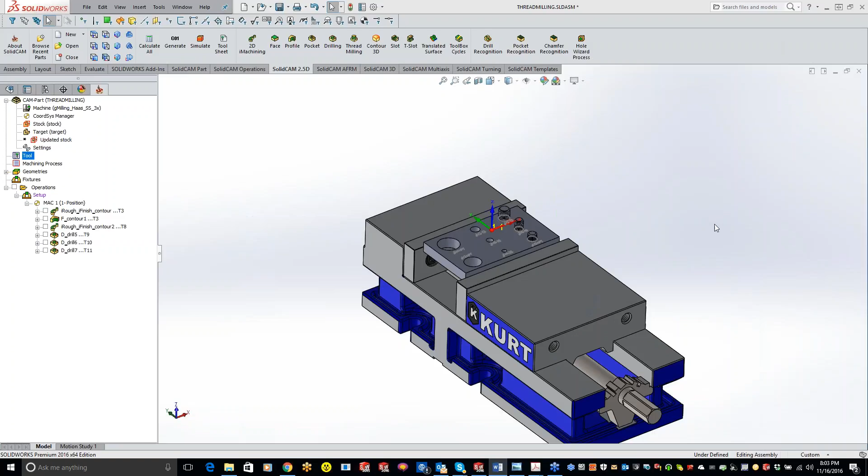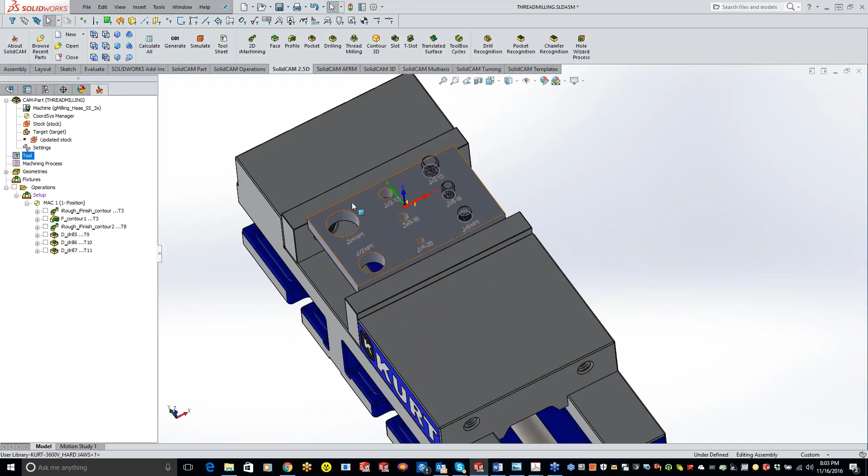All right, let's get rocking with our part. I came up with a part that has a pipe tap with through holes, some standard taps, a pipe tap with a boss, and some standard taps with a boss also. I went through and rough cut everything to size, so the holes are already drilled for you guys - you don't have to waste time watching me drill holes and machine those pockets. If you do have questions along the way, let us know.

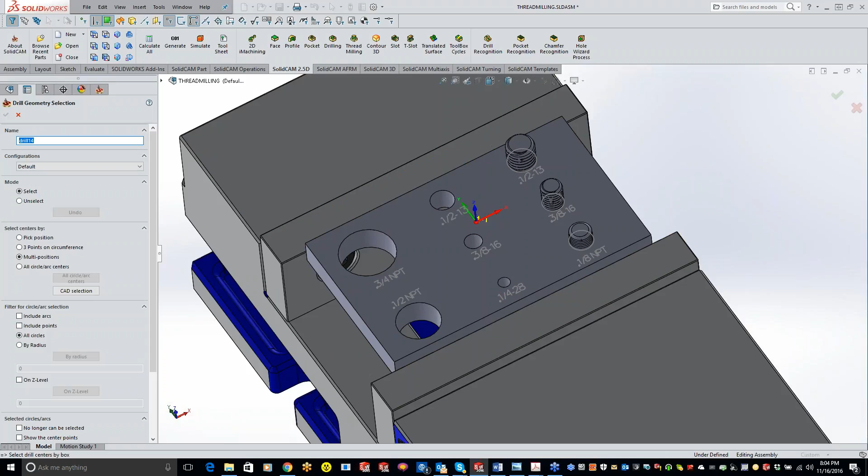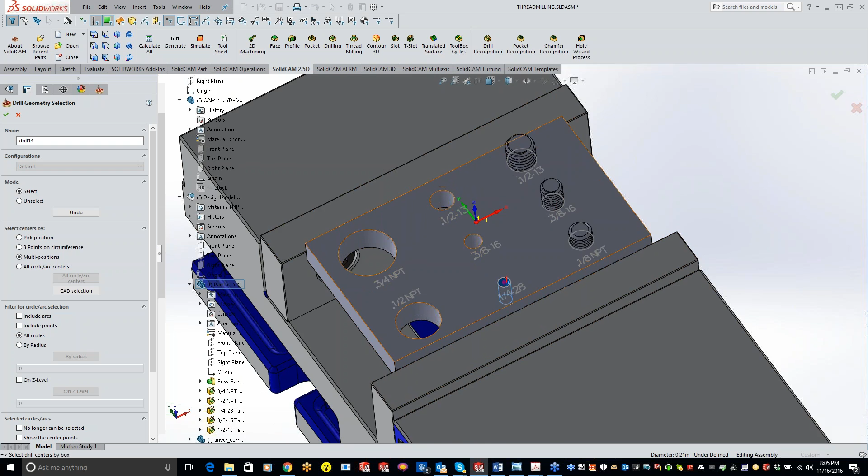So you guys can click on the inside surface. You guys can click on edge. You guys can come over here to your drop down and expand it right here, and you guys can come click on them right here. So just like the drilling op that we talked about before, several ways to pick your geometry, but I know I'm doing my quarter 28, so I'm just going to click on the hole there, and you'll see it pops a purple dot in the center for you, and that lets you know that you've gotten the geometry.

So that kind of covers the geometry, and it doesn't matter if it's a boss or what, if it's sticking up or sitting down, just grab anything that's circular in there and it's just going to find that center point. Doesn't matter the size, anything. We're just looking for the center point, because when we actually go to specify the size of that thread mill or the size of that hole, it's actually done in the thread milling, the tool area.

So what we'll do is we'll grab a thread mill. You'll see I got a couple of drills and end mills already set up just for the previous operations, and I'm going to kind of go through the shaped ones that I've already created here, but we're going to start fresh just because I know with thread milling there's a little bit of confusion on how it works, so we'll just start it from scratch for you guys, and if there's anything that I'm missing, definitely let me know.

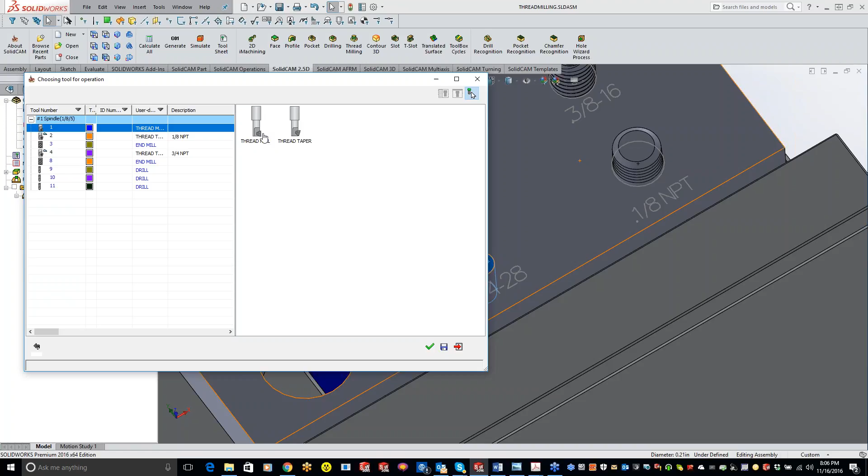So for doing a standard straight thread, we're just going to pick the straight thread mill. Now if you guys are doing a national pipe taper, then you're going to go to the tapered style. So we'll just click on straight one for right now. Now you guys can put your own parameters in there, or we also have a drop down right here and we can click on it. So here's all the standard sizes in there. Now if you guys are doing metric, it will pop up with metric for you.

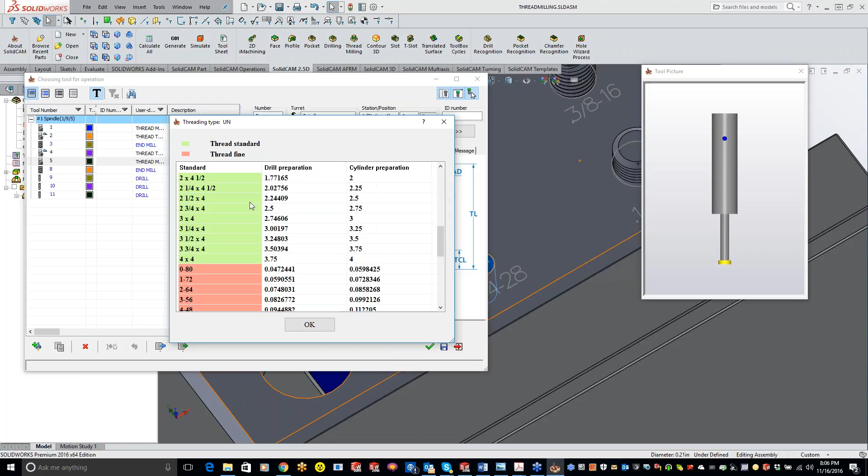So I'm going to scroll down, and you'll see the green is all the standard and the red is all the fine thread. So we're doing a quarter 28. So I'm just going to grab my quarter 28, hit OK. Now I got my tool in there. Now by telling it that information, it automatically populates my threads per inch. It's going to automatically populate my major and minor diameter for that thread mill. And I can modify my cutting diameter here, per what tool you guys actually have.

So if we did, let's just say 0.197, just kind of remembering back at my old job, what we had for a thread mill. I think we had 11 teeth. And as soon as I grab that 11, see how the thickness changes for my cutting length? So it's basically saying I have 11 flutes of cutting, or 11 teeth showing up on that thread mill for you, or here, 11 of these teeth right here.

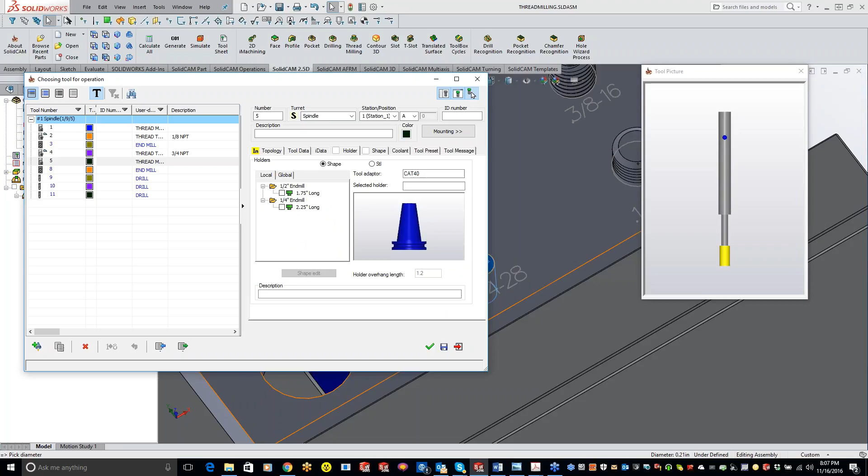So let's see, we'll do an arbor 0.236, and that should be good for right now. Let's throw a holder on there, and use a quarter inch, and I'm going to suck it up in the holder just a little bit more here. I'll do 1.2.

Okay, Kev, if you had a standard or typical threads for a particular customer or company, you could set this up and put it into a template as well, correct? Absolutely. Yep, absolutely. And what I'll do for the next tools that I actually kind of did up here is I'll actually bring them out of a library.

So for those of you guys that are using SolidCAM, you guys should know that in the library that comes with the install, there is one that's called Master for Mild Steel and Master for Aluminum. You're actually going to find a lot of thread mills in the Master for Aluminum, just because it's a tool list that I used to use at my old job, and there's about 800 plus tools in each of those.

Now they're not going to have exact feed rates, but they're going to be pretty close. They're the ones that I used to run, and like I said, some might be a little fast, some might be a little slow for you guys, and we're all machinists and we all like to do our own way. So I kind of went the middle of the road for you guys for that feed rate. So all right.

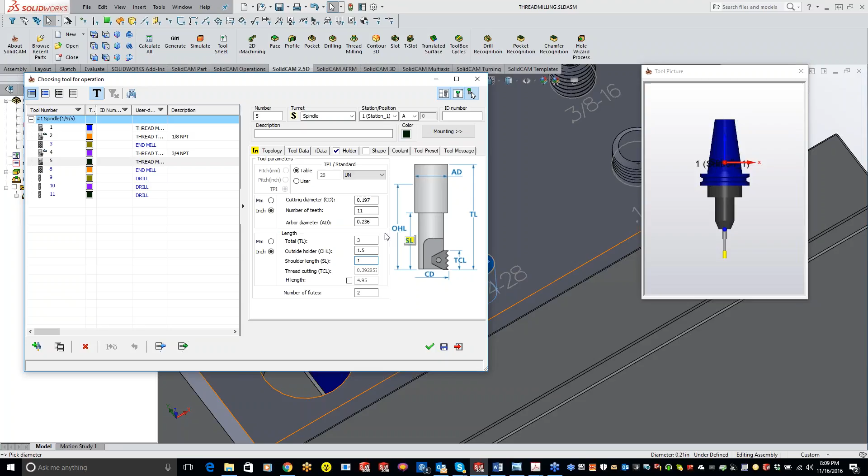So now we got our tool, and we specified we're doing a quarter 28 thread mill. We specified our threading length and all that stuff. Standard stuff right here, your upper level, lower level, and it's already got my levels picked out. So upper level is actually a ½ inch below the part, and my thread depth is ½ inch. If I want to go a little bit extra, I can definitely take that and put that right here as a delta.

Now the technology, where all the guts are. There's a lot of stuff in here that really makes thread milling a lot easier. So we'll just start from the left side and then move over to the right side. So what we can do over here is we can do an internal or external thread. So are we doing a boss, which would be the external, or internal? Now this major thread diameter right here is automatically going to populate from that tool that we picked with that drop down. So that number will automatically be in there.

Now if there's one that's not in that list, more of a custom thread for you guys, it's not going to be in that table, then what you'll have to do is put your threads per inch, and then manually type in the major thread diameter. So now if we're cutting right-hand threads, left-hand threads, do we want to start from the bottom and work our way up to the top, or start from the top and work our way down to the bottom? So we're going to pick that option.

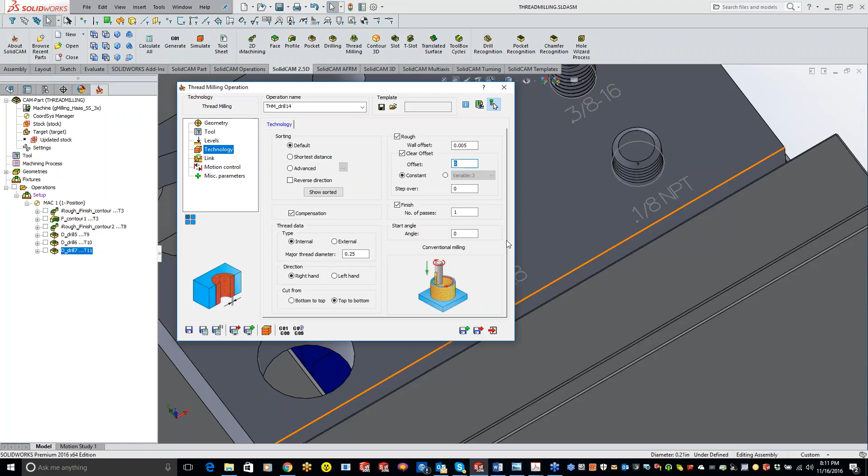Now, in the roughing operation, roughing is just like any other roughing operation. We can put a wall offset in there of, you know, 5 thou. So what we can also do here is a clear offset. So if you guys are getting a lot of material out there, or you need to take little fine cuts, we can do a clear offset of, let's just say 10 thou for right now. And I can set my variable.

So I can set it so it's constantly stepping over 5 thou, or what I can do is do a variable. So the first initial step over is going to be 50%, the next one is going to be 75%, and the one after that is going to be 100%. Or we can do just two variables where it's doing 75% step over and then 100% step over, or you can do one variable that maintains that full step over.

So kind of neat. You guys can pick, and you can manually type in what you want here also. So real nice if you guys have a really small thread mill and a harder material, set these variables up, and it works really nice.

So moving farther down here is the finishing. How many finishing passes do you want? Then also the starting angle. So maybe you guys want to start with your thread mill at 90 degrees, 45 degrees. You guys can put that angle in right there.

All right, so in the link section you're always going to have your lead in, lead out, and basically it's going to be defaulted to start from center, and it's a great place to start since we're using a thread mill. So it's dropping straight in, working its way around, and then coming right back to the center and pulling straight up. That's more important not for the straight thread mills, but when you get into the tapered ones or the custom ones, with a skinny shank that expands out, and we obviously don't want that to hit as it's coming out of the hole.

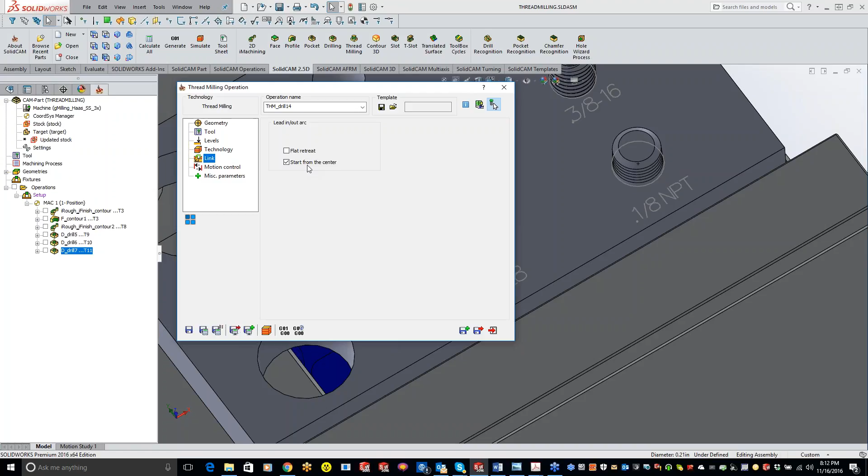So, okay, we'll do a save and calculate here. Yep, looks like I got too much of a clear offset in there. Let's do 5 here, and let's do a 1. Software's looking out for you, Kevin. Yeah, it's telling me I don't have enough room to wiggle my tool around for a clear offset here. Better to figure that out up front. Yeah, I drilled it pretty close to size, so we'll just turn it off for this one and we'll work on the next one.

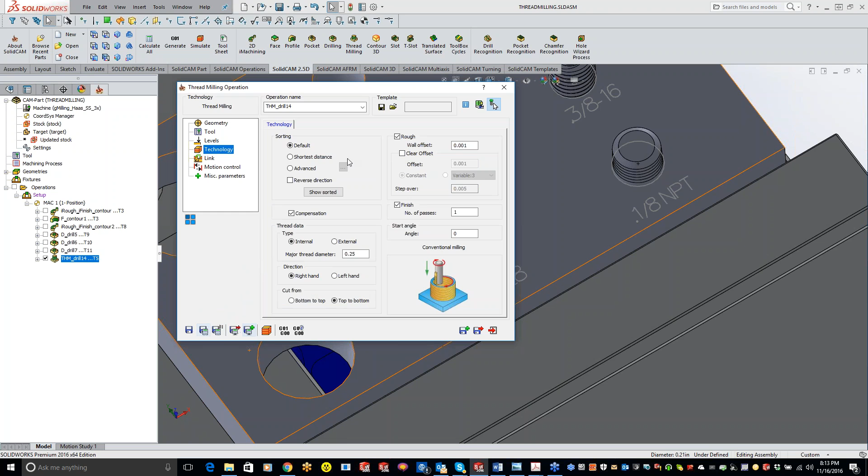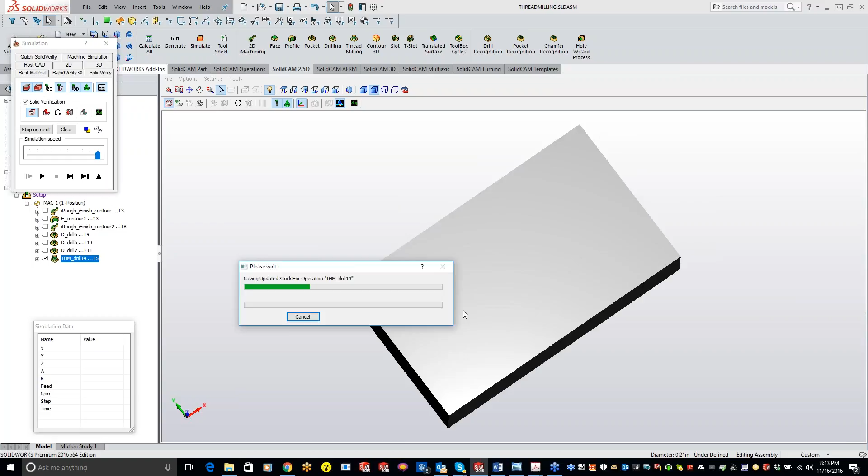Okay, so you'll see what happens is we drop down and we went around and arced off. And we actually took it in a couple steps here, so let's just do a solid verify so we can see exactly what's going on. All right, so step it through here. It's taking its first initial cut and then the second cut and then doing the finish pass, and that's it. So we have our threads.

Now the thing with thread milling is you'll see that the tool is not actually showing the teeth, which is fine. This is just for visualization only. I'll show you at the end how to create the teeth in there, so if you really want to get down to the nitty gritty and see actual threads cut in there, we can do that also. It just takes a lot of computing power, right, Kev? That's why we don't do the threads normally.

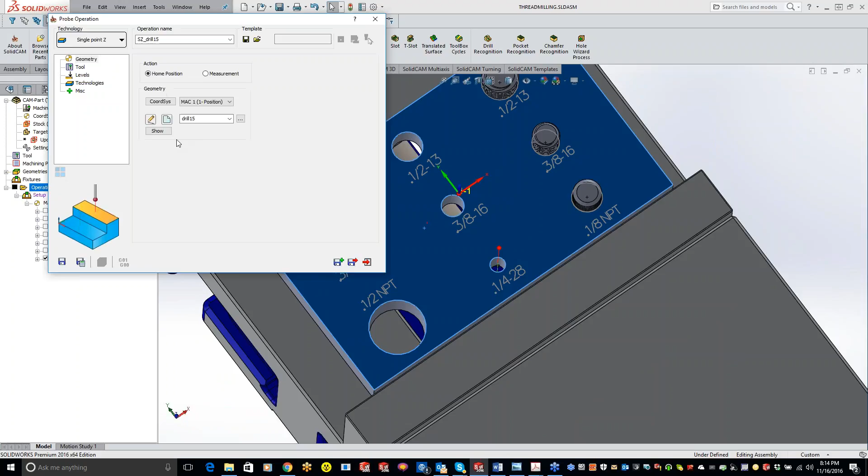Yep, absolutely. Hey, just one other quick thing, Kev. Wouldn't you maybe probe that part before you got started? Oh, yeah. Just to get everything. I kind of forgot about probing here. Let's add that in real quick. Add probe, and we'll just do a Z hit. That looks good. Actually, no, I can't take a Z hit down there. I have to take a Z hit on the top of my stock. Didn't even catch that.

You'll never invite me back.

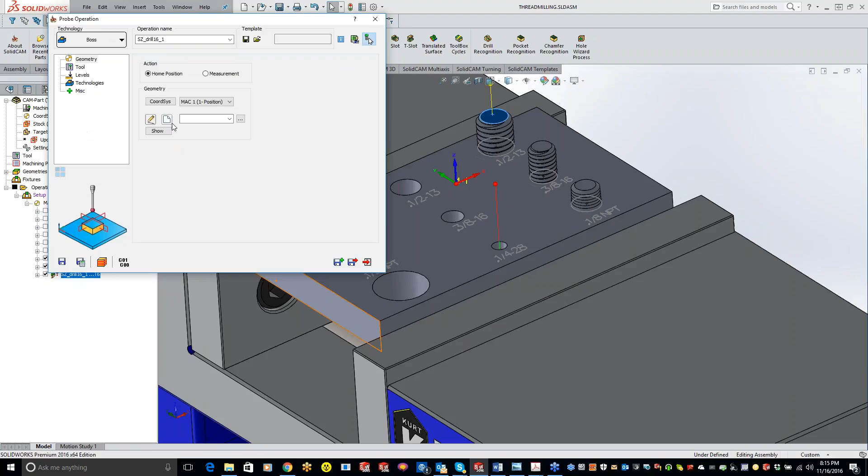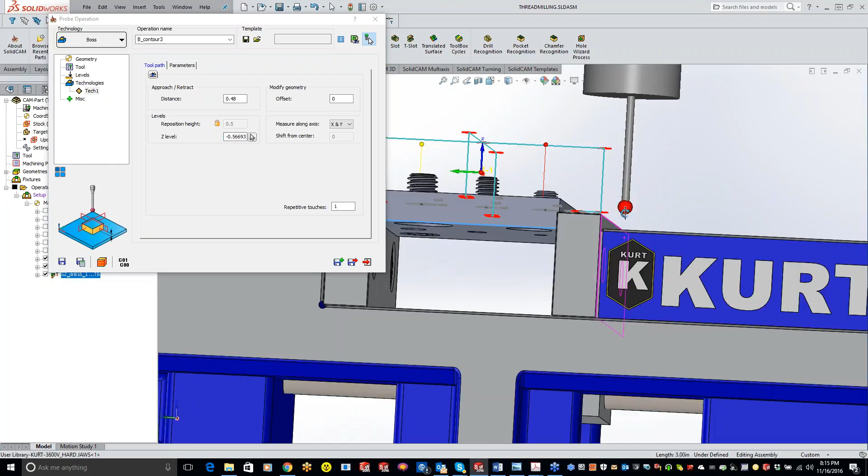Okay, so it's save and calculate, and let's do the boss. Grab our geometry. And let's do a show real quick, XY. Definitely going way too deep here. Okay, so that should hit right on our stock, and we might get a little close there. Let's raise it up right there and see if we can calculate. Okay, so now I got my part probed up so we know where XYZ zero is. Let's move this up to the top of our list. Okay, so now we got our probing and know where our part is.

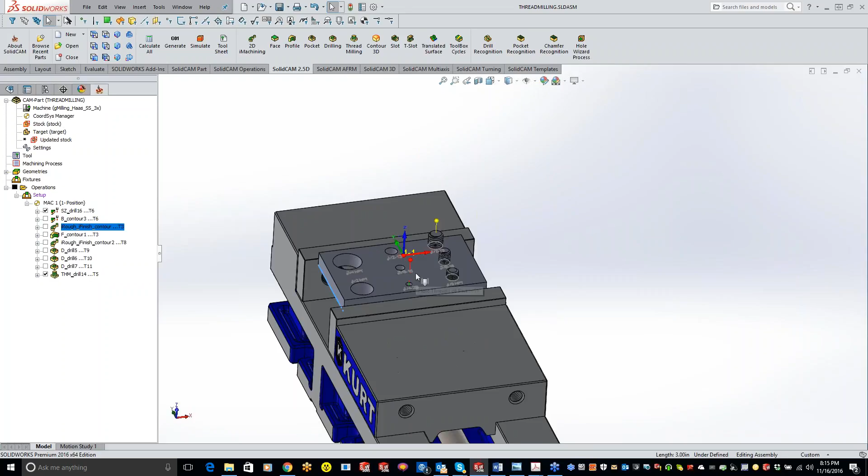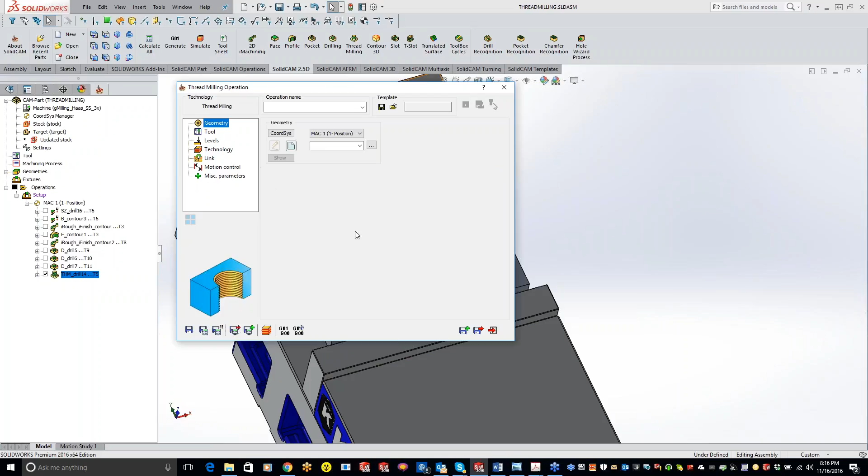Okay, so got our 1/4-20 hole right there, and I drilled that right to the size on the drill chart in the machinist handbook. So now let's get over to the 3/8-16. Basically doing the same thing here, thread milling. I grabbed the center of the circle last time, so I'll just grab this one this time. Got our 3/8-16, and we are going to create another new thread mill. So we'll do a new thread mill and grab a 3/8-16. There we go. And like I said, we can modify these numbers however you want.

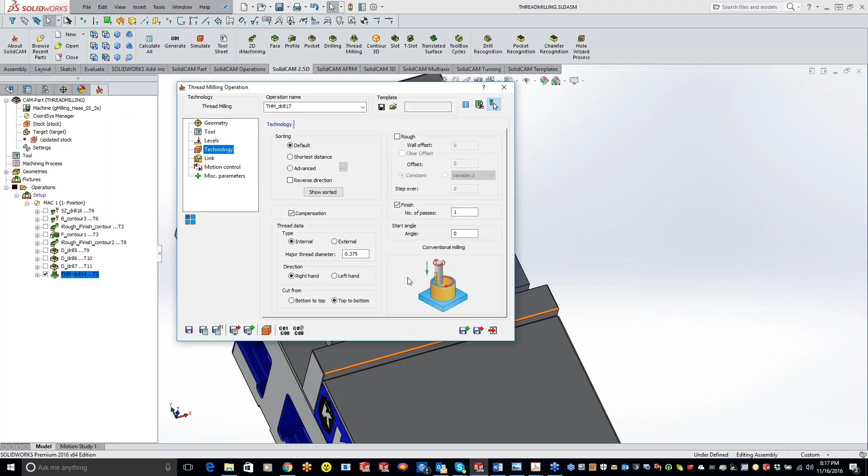Obviously, I could have a little bit more teeth on there, but we'll just try it with 2 teeth, so it's going to have to go down in steps. So our levels are set. Technology, we're doing internal right hand. Now, it's always going to default to go from bottom to top. If you want it to default from top to bottom, you just create a simple template and save that as your default template, so anytime you open a new thread milling operation, it's already set to top to bottom. I just forgot to do it here. And then under link, we're going to do right from center, save and calculate.

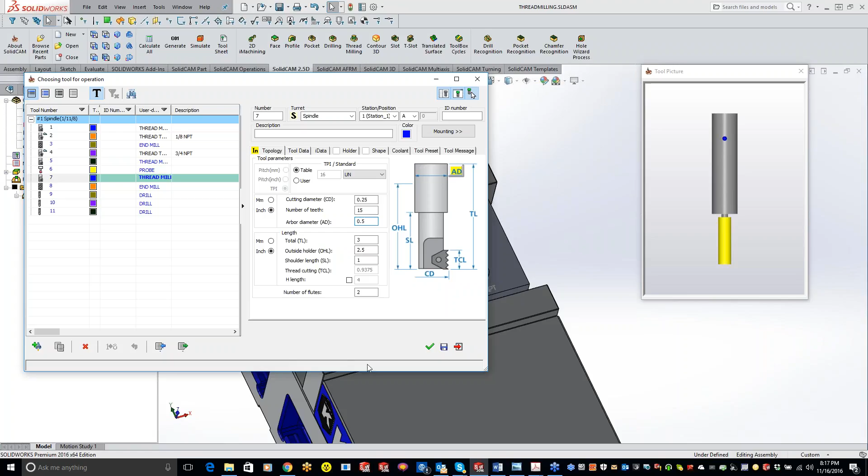And let's go ahead and do a simulation. And we'll slow it down a little bit here. Yeah, a little too fast. So we took it in quite a few steps there, and that's just because we have only 2 teeth cutting. Now, if we had that same tool, and let's say we had 15 teeth cutting, now it's going to take it all in one cut. So it all depends on, the software knows, since you have so many teeth, how many cuts it needs to take to make that actually happen for you guys.

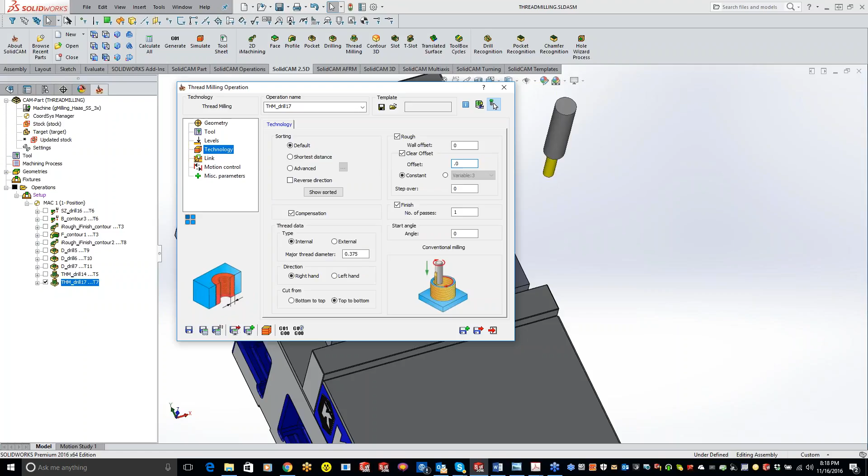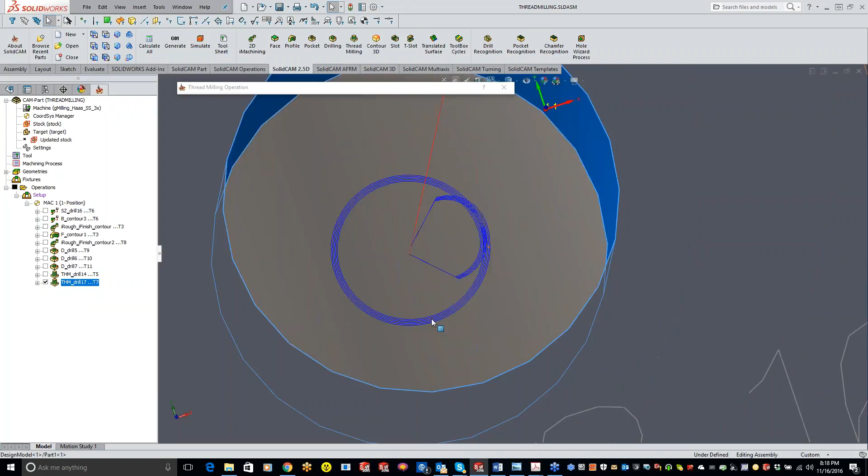Now, if we wanted to, I cut that one kind of close too, we could do a clear offset of, see if it lets me here, of 5, and step over 1 thou. So now, if I zoom down in here, you'll see all my passes that are going around. So we got our first initial one right here and stepping over 1 thou all the way up to the wall. So it really takes nice light cuts for you if you need to, or we can make that a heavier cut by doing 2 thou. And now you'll see our spacing is a little bit different having that 2 thou in there.

Or maybe you guys want to do the variable way. So it takes that first initial cut, it's going to be 50% of whatever that step over is, and the next one's going to be 75, and the next one is going to be 100% engaged in. So. And Kev, what would be the differences? Just material, strength of the material, or?

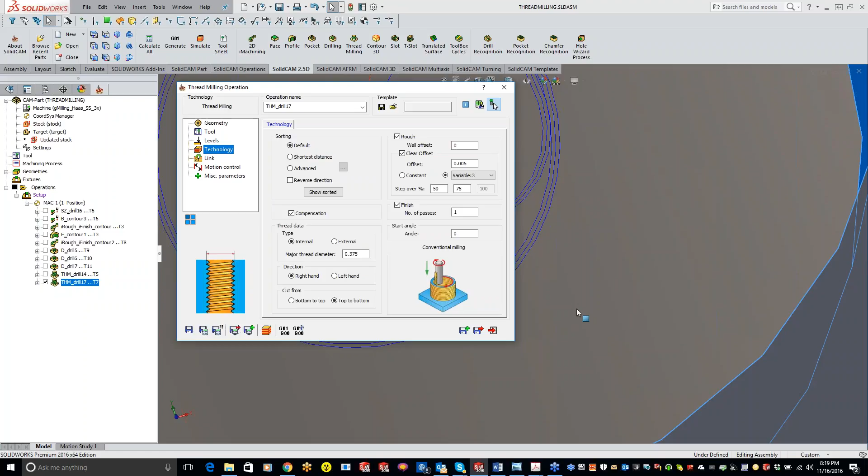Yeah, a lot of these thread mills are pretty thin, not very strong. So you got to take nice light cuts for that to cut those threads in there. And it all depends on the diameter thread. The smaller the thread you go, you get into a 4-40 thread, definitely want to take its sweet old time working its way around in there, just because it's going to be such a small shank cutting inside there.

So, Kev, quick question: can you make it come back to center and just spiral all the way to the bottom? Yep. So that's going to be considered a single point thread mill. And we'll get to that real shortly. And what we'll actually do is it will do a spiral working all the way down to the bottom, just because it's a single point. Let me try it with this one.

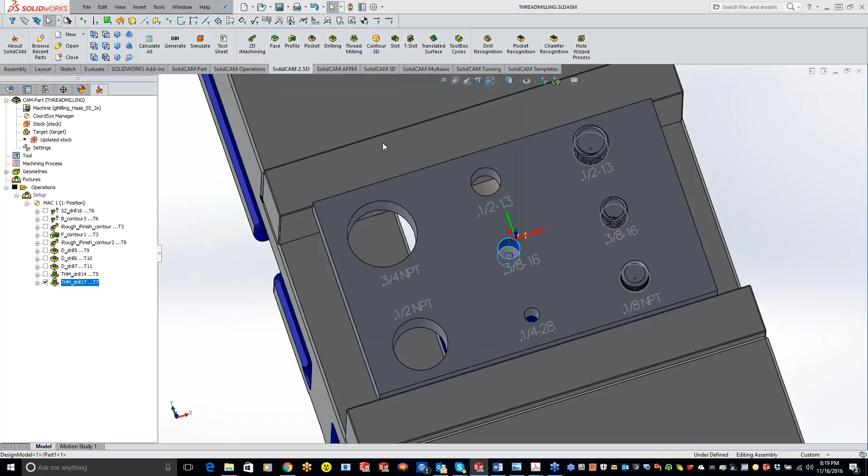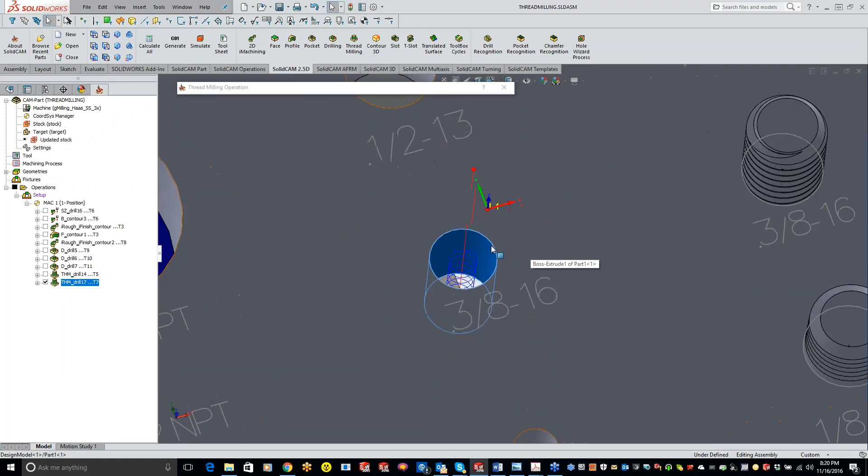Let's go to our tool, select, and I'm going to switch that to, see where am I at here, number of teeth, switch it to 1. And let's just turn off some of this so we can see better. So now, since we have a single tooth, you'll see, well, here, let's just do a solid verify here. And you see it does a spiral down.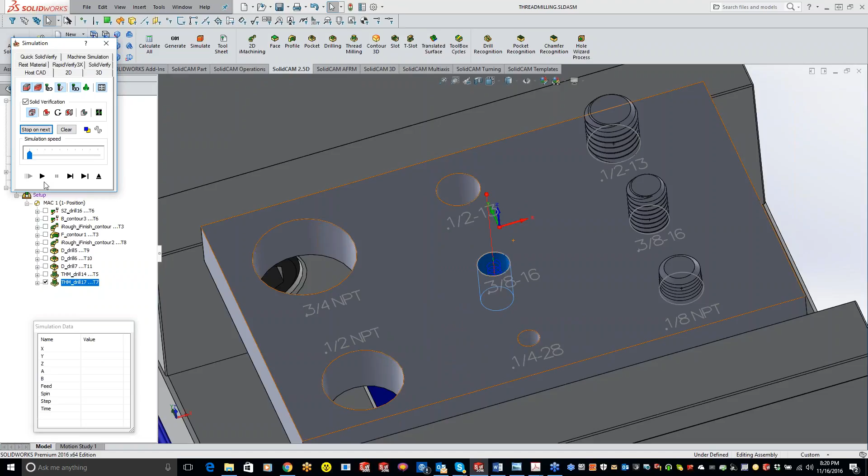Let me try HostCAD so you guys can see it a little bit better. And we'll do tool, turn off the holder. And I'm not sure if you guys can see that clear or not, but it is doing a nice spiral corkscrew, starting from the center, working its way out, and then it gets down to the bottom here, comes back to the center, and pulls straight through. So does that answer your question, George? Hopefully. Good. Sure does. Perfect.

Kevin, I had a question too. Just for my own knowledge, when would a single point thread mill be advantageous over multiple tooth? Small little areas.

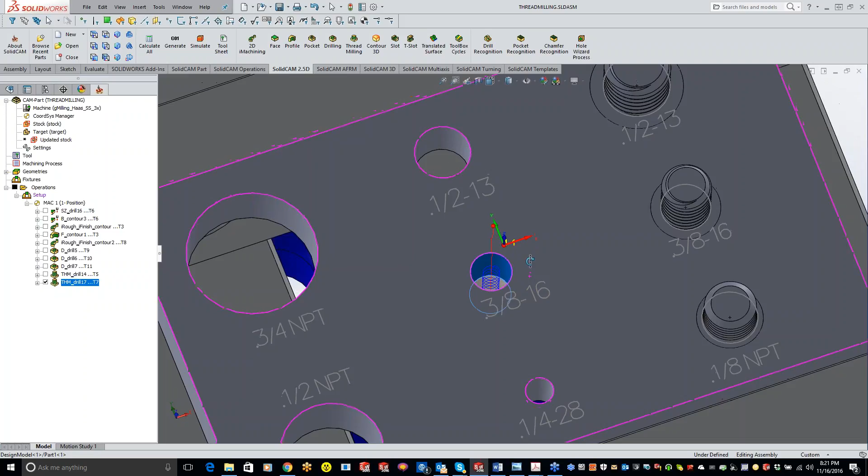You get the single point thread mill more for your oddball sizes. To actually purchase a thread mill for an oddball size is going to be quite expensive, versus a single point thread mill will cut any size thread, because the angle is always going to be the same for you. So George, you beat me to the punch too. Yep, perfect. Okay. So that's where you can use those single points.

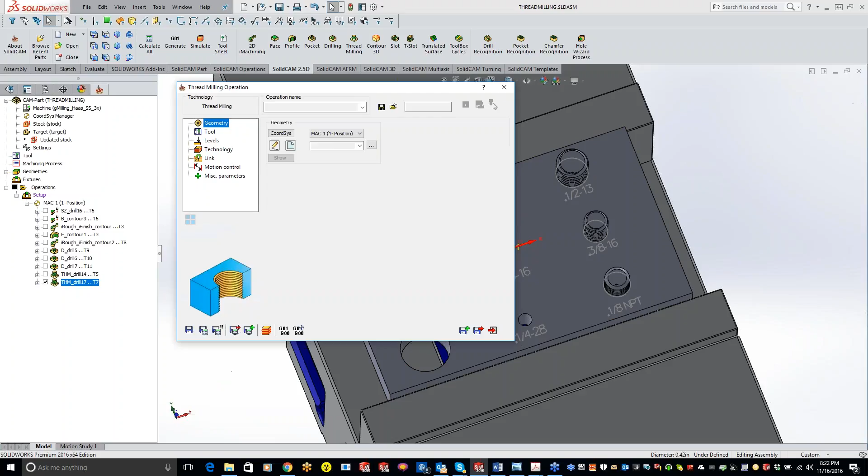Cool. All right, so now let's get into half 13 here, and hopefully it's not getting monotonous, but we'll grab our half 13, build our tool real quick. Now, like I was telling you guys before, every one of you has this, as long as you're pointing to the right directory here. But if you go to import

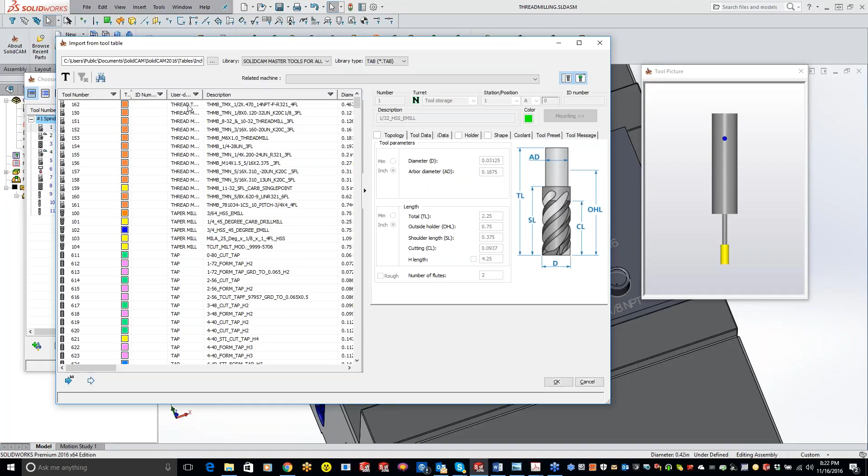and see how I have master for, well, you guys have center drills, face mills, general, getting started, and there's master for aluminum. If you go here, there's definitely thread mills. So if I come up here, you'll see all these are thread mills for you guys. So definitely come in there. If you don't want to draw one up, you can come and import them in.

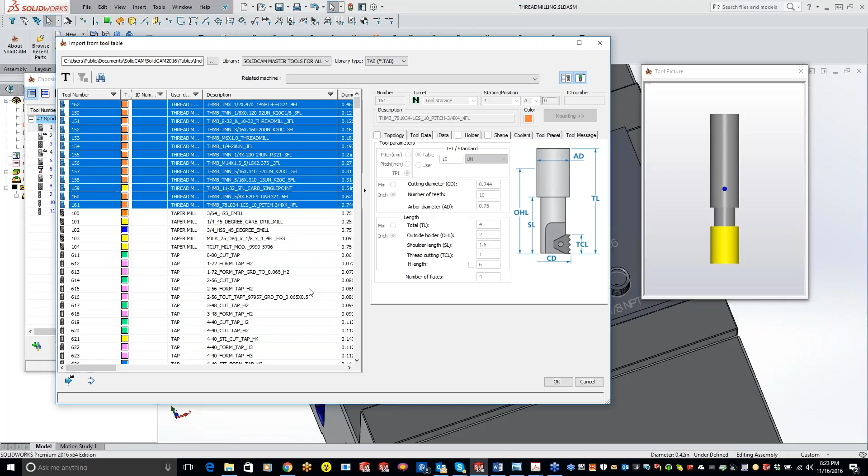Or like Steve was talking about before, you can create a template, or you can just take all your thread mills, put them all in the library, so that way you don't have to click every single time. So I'm kind of going the long way about this, just so you get more familiar on how to create a thread mill, how to put it in your tool library and whatnot.

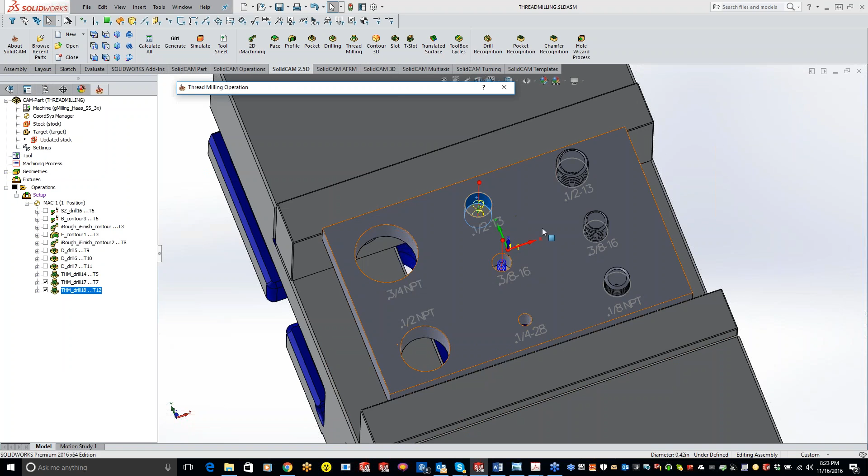So, okay, grab that new, and we're doing a half 13, hit OK. And we'll just put 6 teeth on there, green check mark. Levels are already set for me. And what I want to do is top to bottom, do an internal thread, save and calculate. We have our thread milling. It's actually taking 2 cuts just because I didn't have enough teeth right there. So simple, easy, guys. Simple to use.

The tool section does get a little on the scary side for some people, but if you just click your table, grab what you're looking for there. Now if you're doing a pipe tap, if you come in here and grab the standard, you'll see we have all the pipe taps in there, the British pipe tap. From my understanding, the British and the national are pretty much the same thing. But you have all your standard pipe taps right there. So real easy to use, and then it knows to go down at an angle. All right, we'll say no to that. We'll get out of here.

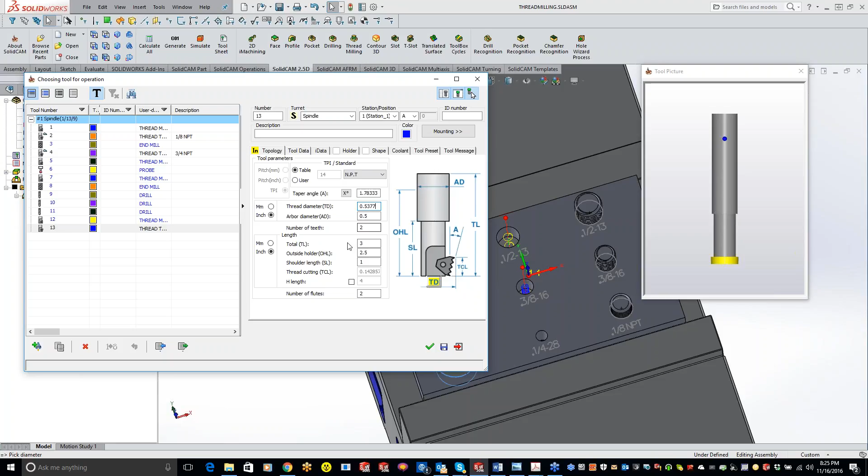Now, let's go ahead and do the half pipe tap. So we have our 1/2-inch NPT right here. We'll do another thread mill, grab our geometry, grab our tool, and now we'll actually build that taper one. National pipe tap, and we are doing a half. Hit OK. We can modify these. The angle is the taper angle of the pipe tap, so it already puts that angle in there for you. You can make this smaller, bigger, what you need, more teeth. We'll just take what we have right now. Levels are already set for you.

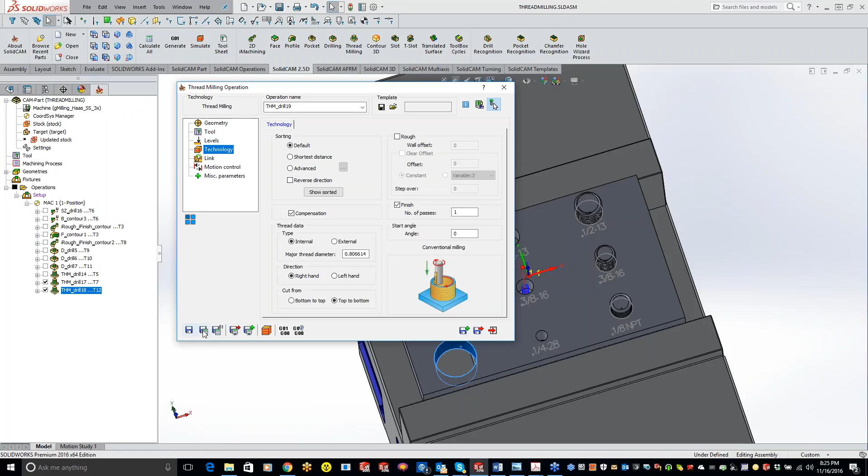We will do a top to bottom. I forgot to tell you, you have compensation right here. When I was machining, I noticed SolidCAM does tend to cut just a hair on the small side. The comp is defaulted as turned on. So if you do a half 13 thread and you put your thread gauge in there and it's a little tight, just open it up a little bit using your cutter comp. Okay, so save and calculate, and let's do a simulate here.

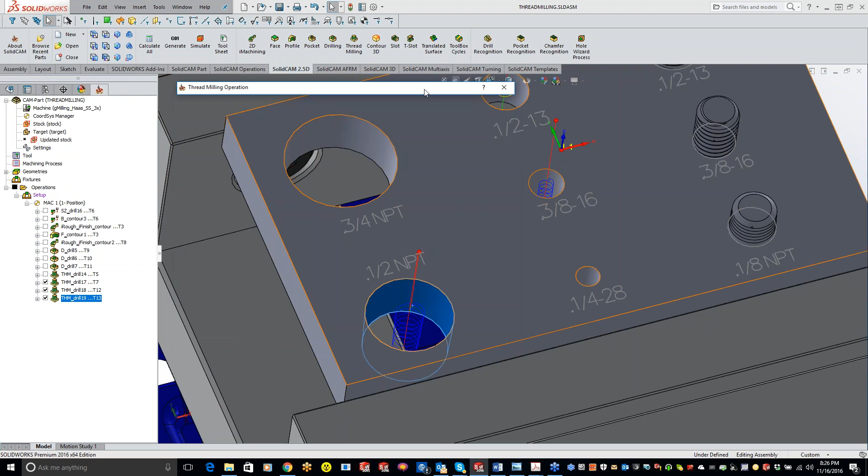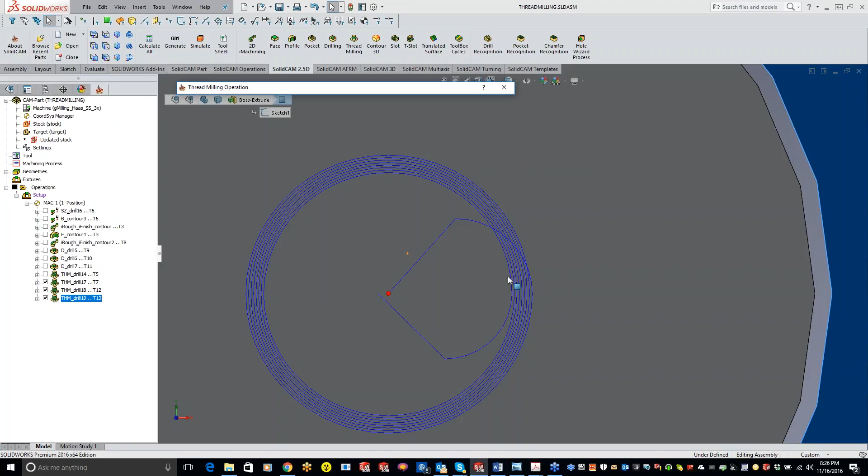Now, let's do a solid verify, and you'll see we're doing a spiral cut all the way down to the bottom here. And it's actually narrowing in as it goes down because the pipe tap is tapered. Let me do a top-down view here so you get a better view. Let me get rid of my tool. You'll see we're starting right here and we're ending in here. So it takes into account the taper of that tapered pipe tap for you. Simple, easy as far as I can tell.

So now we'll do the three-quarter pipe tap right here, and I actually drew that tool up. So let's go ahead and add another thread operation.

Grab that center point. Kev, what about multiple starts and stuff like that? I know that comes up a lot when I'm talking to people about the software for thread milling. If you were to start and stop kind of deal? No, multiple starts on the threads. Maybe I'm asking the wrong question. I should probably just keep my mouth shut. I'm just not sure what you're asking.

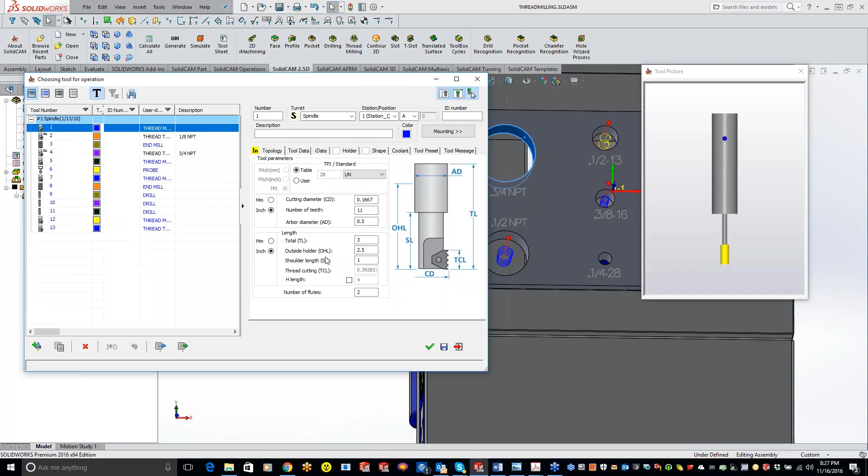Multi-leads, thank you Clarence. Yes, multiple leads? So like leading into the part, just where it would start, kind of? Yeah, yeah. We can skip the question. No, you're good. Let me grab my, let's see, 3/4 pipe tap.

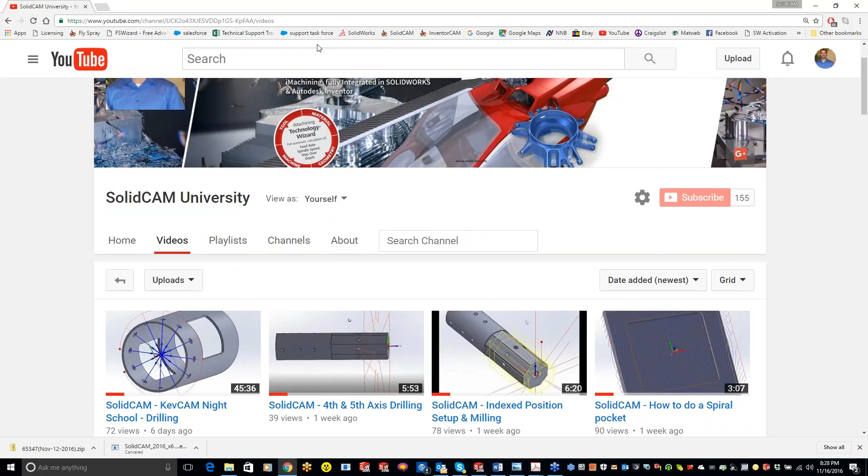Okay, I'll address that real quick, Steve, because I know what you're talking about now. So right here, what I did is I created a shape tool. For those of you that aren't sure how to do a shape tool, I'm going to bring this up because it's a question I get asked all the time. If you just type in 'shape, how to create a custom shape tool,' there's a 3-minute video. If you guys have any kind of custom tool or custom tool holder, watch this video, it will explain everything for you.

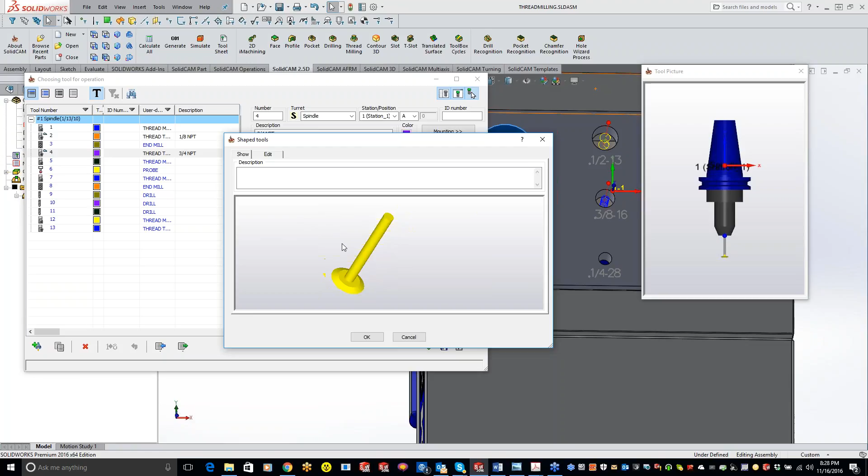So right here, I did do a shape. You can see I have a... basically showing, why can I not rotate? There it goes. Basically showing an exact single point thread mill of what's going on there. So this way we're actually going to be able to see the threads. And like I said, this is only for visualization, it's not affecting the G-code or anything like that. It's just so we can see actual threads being cut.

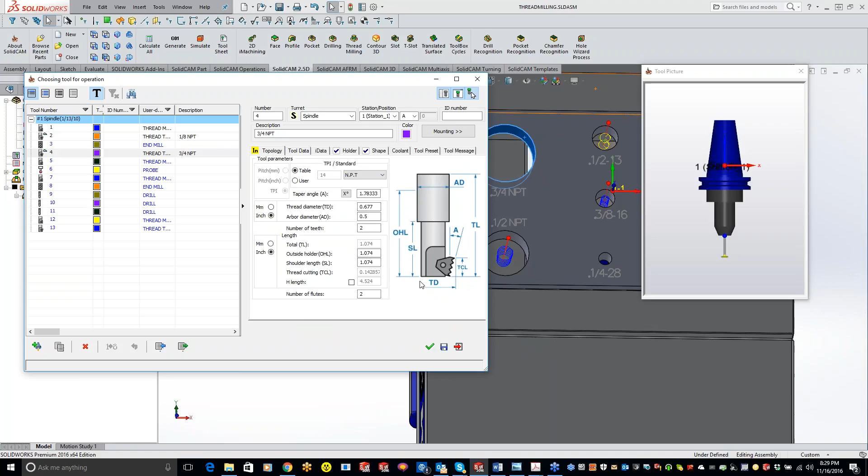So, doing a national pipe tap, we're doing that 3/4-14. It has our shape in there, green check mark. I want to start from the top to the bottom. Now, multiple start angles right here. So if I want to start at 45 degrees versus starting at 0, let's just do a save and calculate here.

So right now, let me do a top-down view. So right now we're starting at 45 degrees. So now if I wanted to start it at 85, you'll see that it actually moved my start point. So is that what you're kind of asking there, Steve? Or I think, yeah. Clarence? Yep, okay.

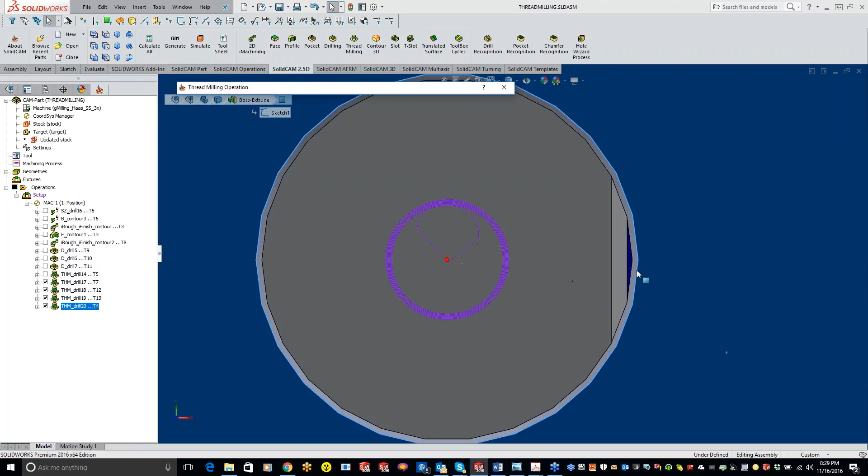So now, now that we actually accommodated for that single point thread mill, we should see actual threads being cut on the material if we do a solid verify. And like I said, this is only for visualization, and I'm cutting way undersize.

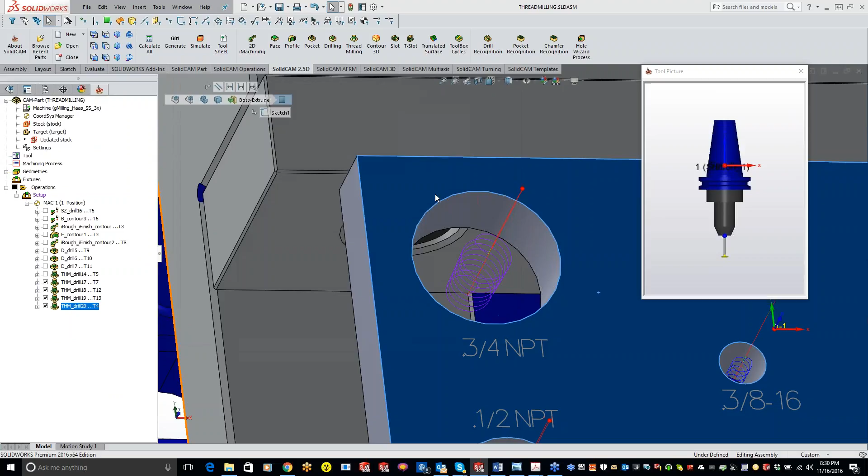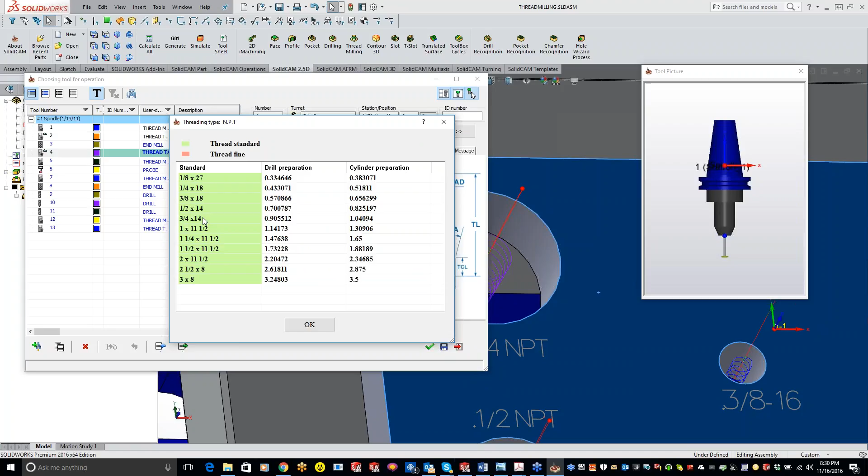Let's see, do an internal, got my national pipe thread. What am I missing here? One. Oh, dang it, messed up my value here. I threw you off your game. He did. There we go. National pipe thread, 3/4. Ah, I'm just hoping you don't invite me back.

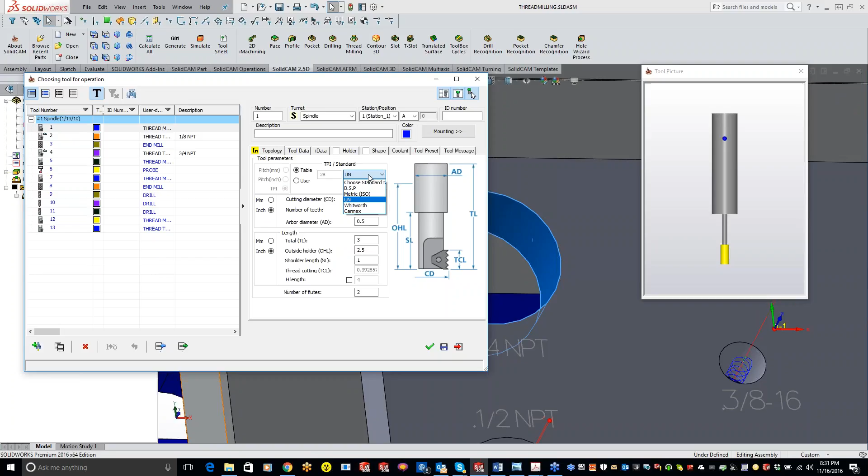Yeah, okay, I'm going to do a fresh start here. Tool select. And I'm going to go to our 3/4 pipe tap, 3/4, okay, technology, and we're going to go from top to bottom. Either that or I cut my hole way oversize. Let me verify here.

Oh, we have something's not jiving with my single point here. Let's see. And... looks good.

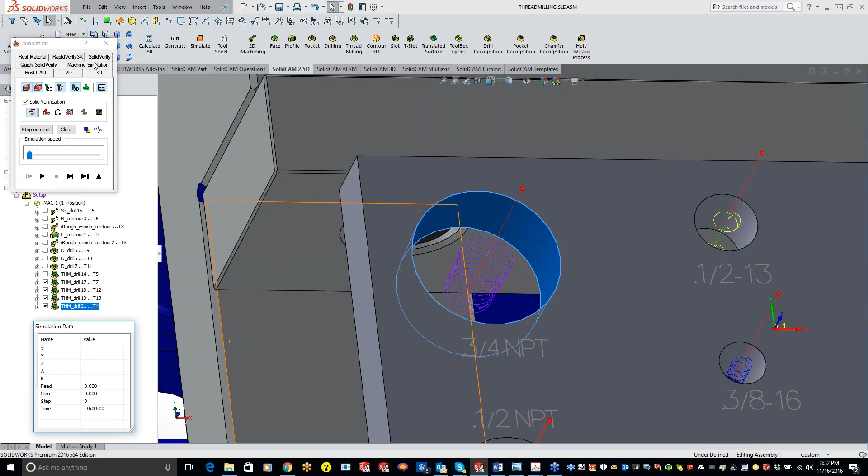Okay guys, I obviously have my cutting diameter off for my pipe tap here. What's going on here? Shape, I'm missing something simple here. Ah, come on. Yeah, I got a bad value populated in there for your hole, Kev? Yeah, let's do 1.5.

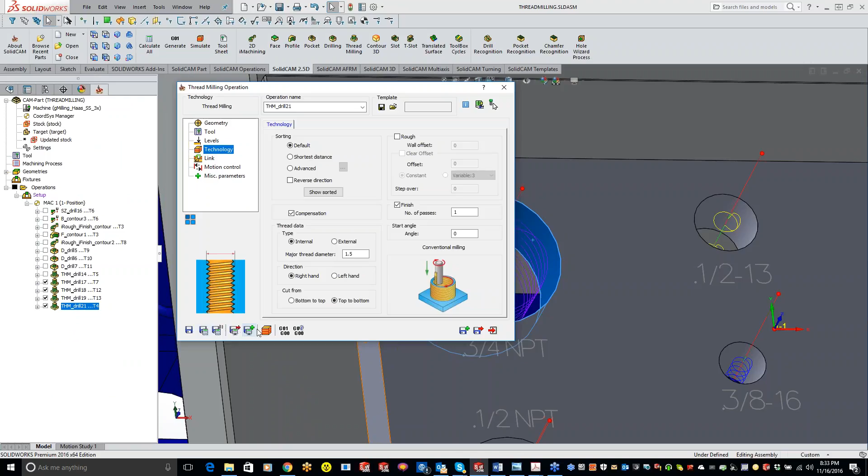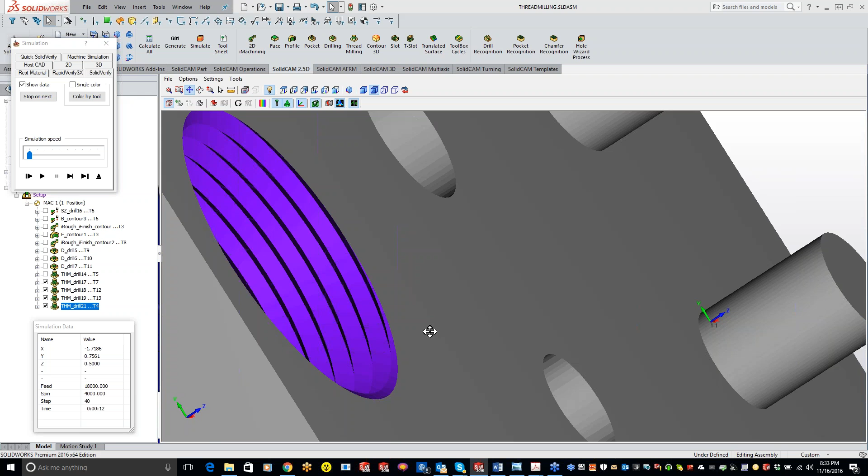Okay, now we should start seeing threads. And it's a little tough to see, but if I pan it over on the side, you can actually see the threads being cut in there. I don't know if you guys can see that clearly or not here, but you should be able to see the threads actually cut in the material there.

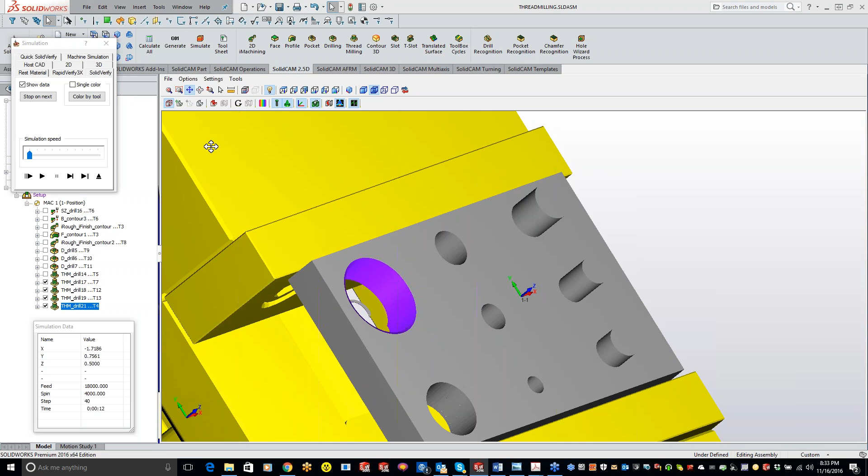So that's, like I said, with the shape tool and all that stuff, it's a lot of work, but the only thing it's really doing for you is just doing a visualization in your SolidVerify. So we'll do that with one other thread. If we go over here, we'll do the 1/8 national pipe taper. So do threading, this one better turn out, or say I'm fired, guys, so.

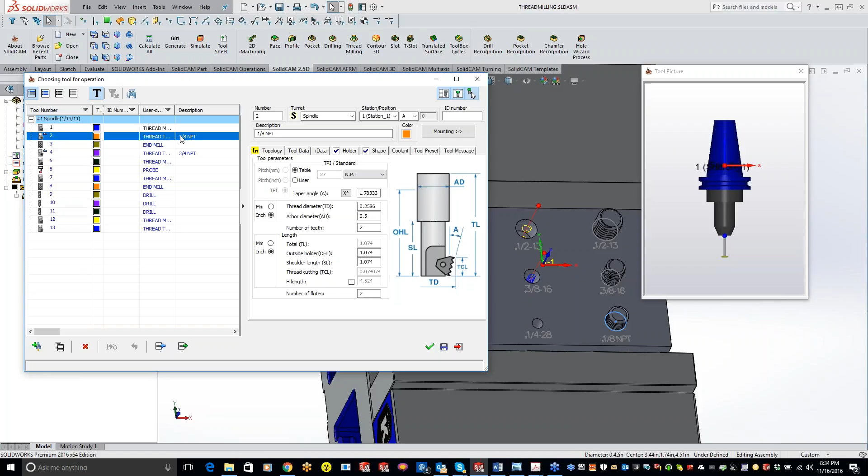All right, I got something going on here. Upper level.

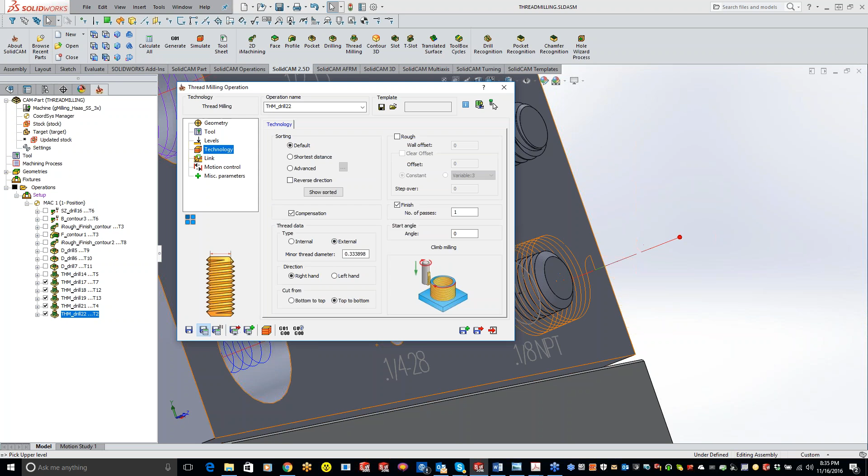Okay, technology top to bottom. Has our thread diameter in there. Yeah, we have something. Oh, here, external. There we go. Oh boy. Nothing like being underneath the pressure.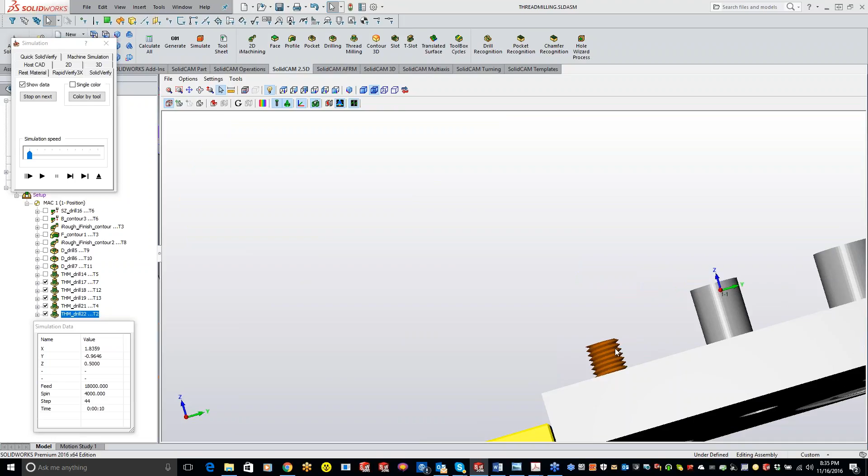Okay, so you can see we actually got threads cut in there. It basically looks like a bolt sticking out right now. And that's accommodating for the taper of the pipe tap, for all the aspects of the thread mill, and that's just because we specified everything right inside your tool, picking the national pipe taper, saying we have 27 threads per inch and it's 1/8 inch NPT.

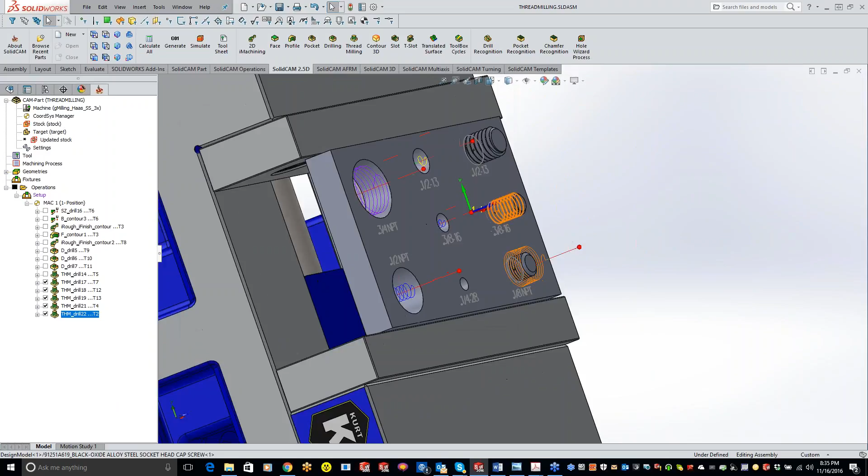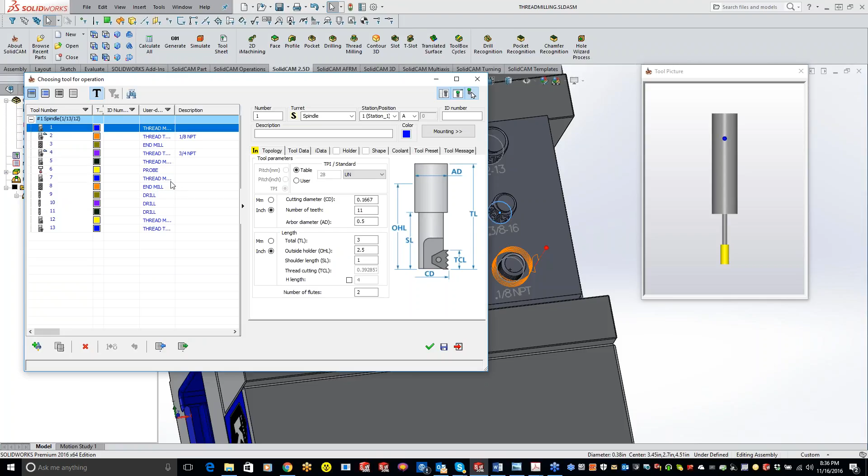Okay, so now we can get to more of the standard. We can actually use that same thread mill for the 3/8-16 right here. So we can add a thread milling. Grab the center there. Tool select, and see, this is the problem when you do it on the fly, is you forget to label stuff. So where is my thread mill for 3? There it is. Hit the green check mark.

Tool levels, upper level is going to be 0 because we're at the top of the part. Thread depth 0.5 looks good. We'll go from the top to the bottom. Save and calculate. Oh, and we're doing external thread.

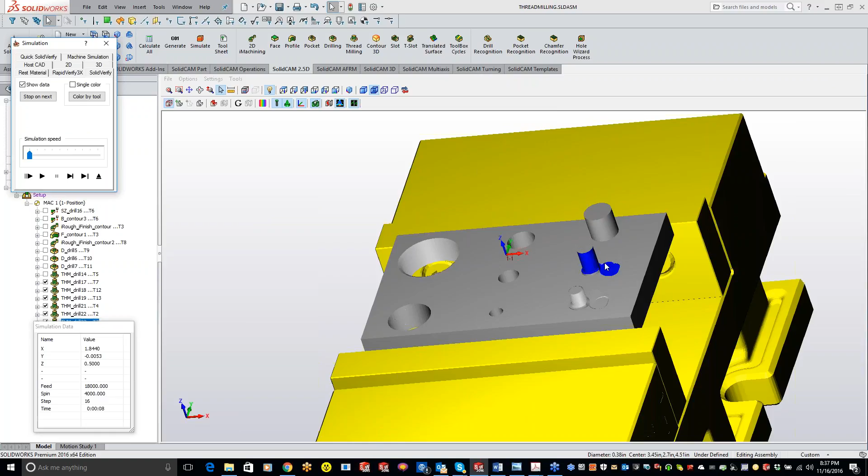So you'll see we got nice starting, doing a spiral, working our way down. Let's do a SolidVerify for you guys here. Obviously I'm going a little too deep on my lead out, so I can just bump that up a little bit as it's arcing off. A real easy fix for you guys. And it's going to be the same thing.

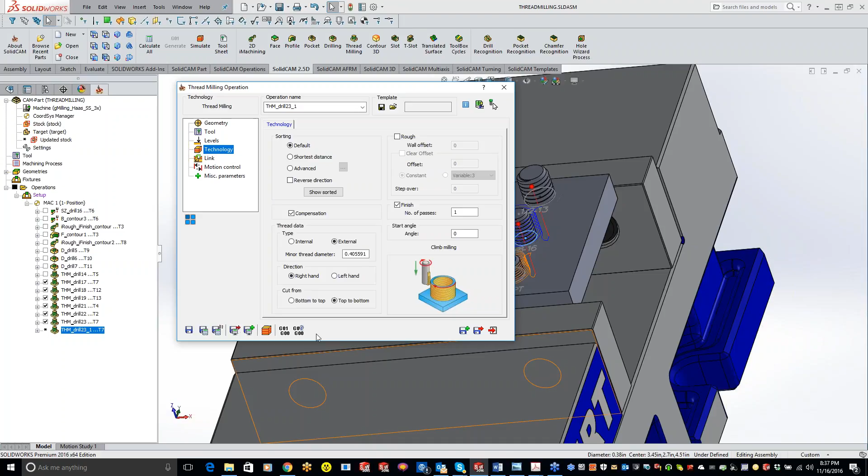Actually, I'll just make a copy for the 1/2-13. I'll just grab my 1/2-13 here, there it is. Levels are all going to be the same. Doing external top to bottom. And I forgot to tilt the new geometry.

And now, since we have a much larger cutting teeth, or more teeth, it's just doing it in 2 passes. So it arcs on, goes around, arcs off, and takes a second pass at the bottom.

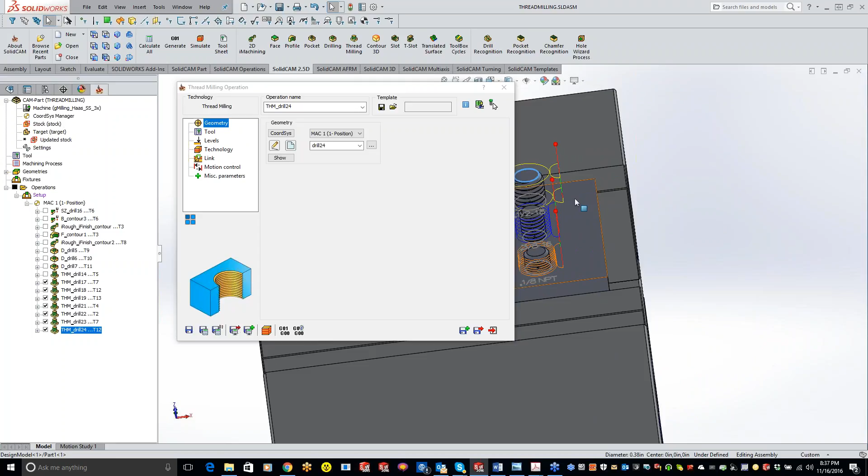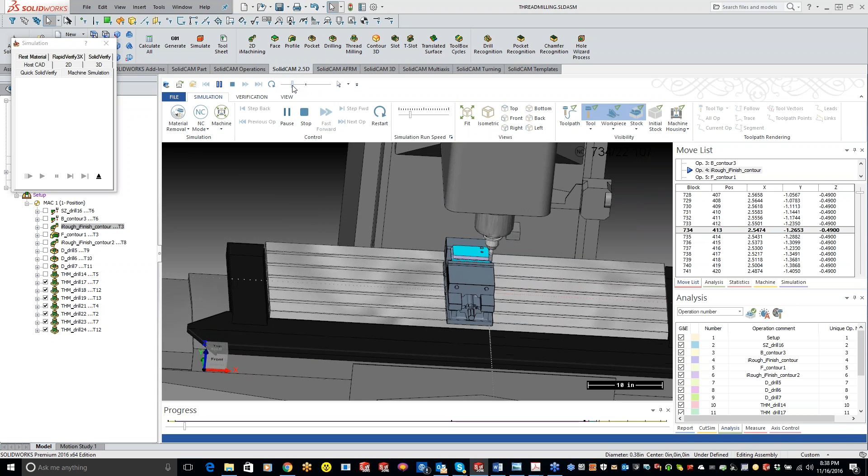So let's take a peek at what we've done so far. Let's just do a machine sim here for you guys. Okay, so let's play it through here. Whoop, going a little fast here. So we probed our part, milling off to those center hubs using iMachining.

It's like I speed it up and then it's going to get to the thread mill and it's boop, all done. Yeah, yeah. No Kevin, Andy helped me out too, and I think what I was really meaning was multi-starts on the threads. With multi-starts. Andy, can you give me an example of when you'd use the multi-starts? Or anybody? So I know I've had that come up, and Darren showed it in the software before too.

We do offer that in the software, I do know. Yeah. Darren showed it before, we definitely have it. Yeah. Acme thread, Kevin, or double helix possibly? Okay, yep, yes, we definitely do that. Yeah, yep.

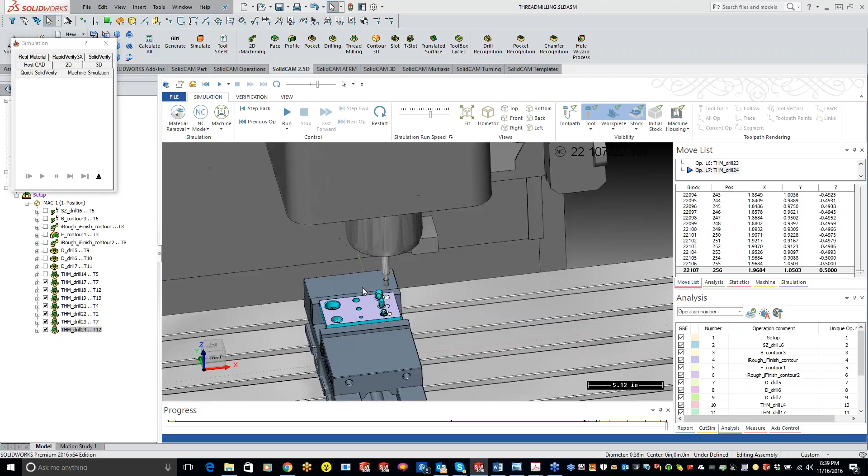And see how thin that thread mill is? That's why we do more passes in there. So that's the finished product right there for you guys with the machine sim and everything. You know, you guys are asking about Acme threads.

Let's open up operation here. So let's just add thread. So you have your table right here. So now if you click it over to user, you guys will get a whole slew of stuff in here.

Every thread type you can think of. So American Acme, you can put your pitch or your threads per inch in there, and you can see we're running American Acme right now. Let's see, not that common for fasteners, but you definitely see it in ball screws.

Yeah, so any thread that's out there is in here for you guys. What you just do is you switch it over to the user, and then you have a much larger pull down. So if I switch it to table right here, you'll see it grays out my threads per inch and my pitches in inches, or my threads per inch, and I just get a smaller table right here. Or if I click it over to user, more of the custom, now I get every thread out there. So that can answer your question, Andy and George and Eric.

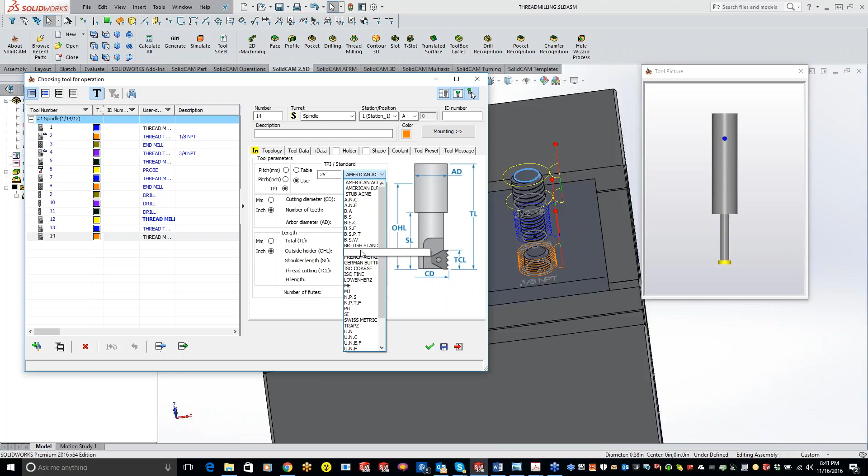Is there any other questions, or anything you're curious about, or want to see with the thread mill? Like I said, I tried to think of everything I could - pipe tap, standard tap, tapered, single point, multi-tooth. Is there anything else you want to see, or anything you'll want to try to stump me on?

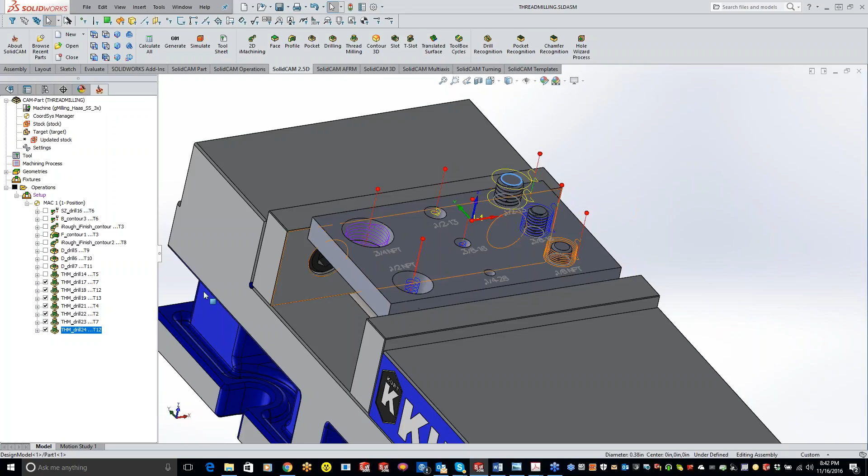Eric, you got to give me a good idea and I'll get you a cup and a t-shirt headed your way, and a hat - and they're not cheesy hats either, they're actually embroidered, spent a little money on them. So Eric's going to be sending me an email in two seconds saying 'I like a suggestion.' But no, I like it.